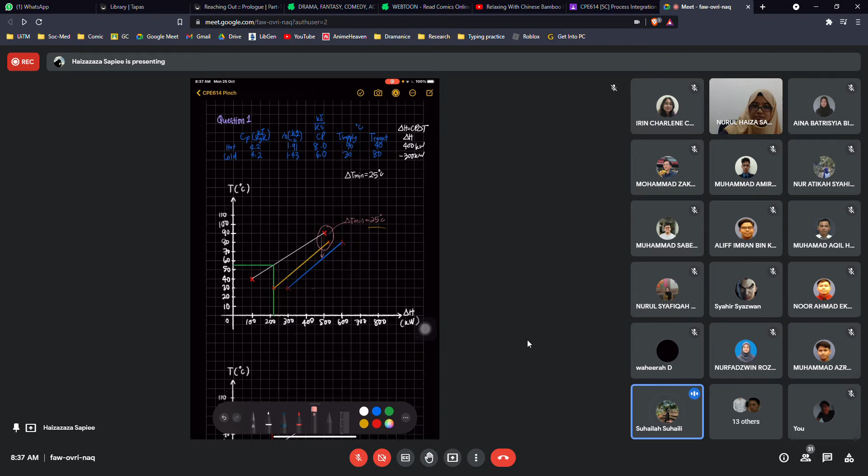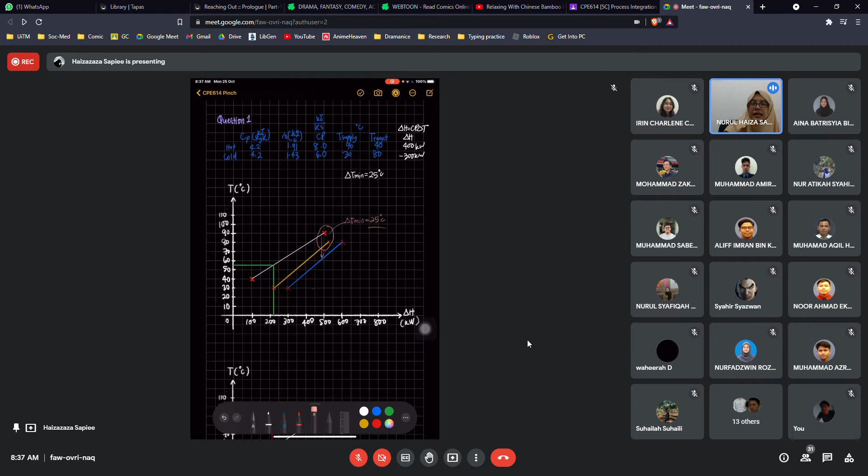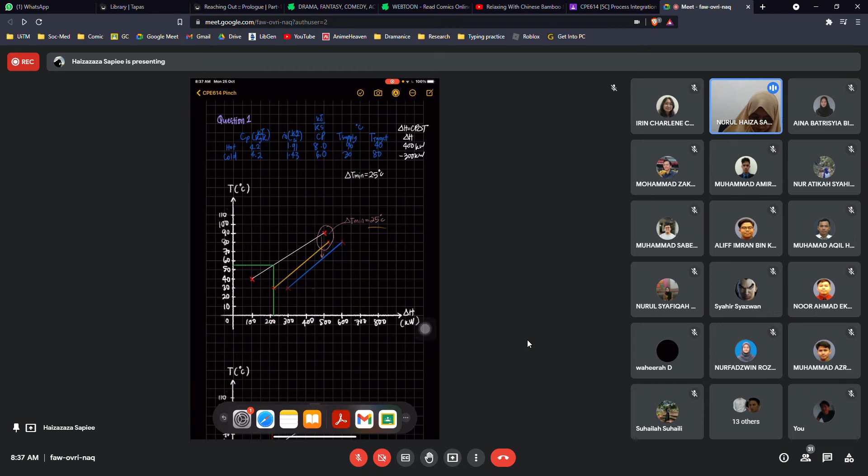Ya. Yang this one, kita jumpa pinch point yang baru ni sebab it only exists yang one line je kan? Sebab dia ada one line je kan? Okay. But the same thing applies. So remember macam I said during our lecture last week, was it last 2 weeks? The same thing applies if we choose the wrong pinch point. Contohnya kan, and that's why I think it's important for us to understand that we only can have one pinch point kan. So contoh kan, saya tak ingat with this class we cover that or not. Tapi contohnya

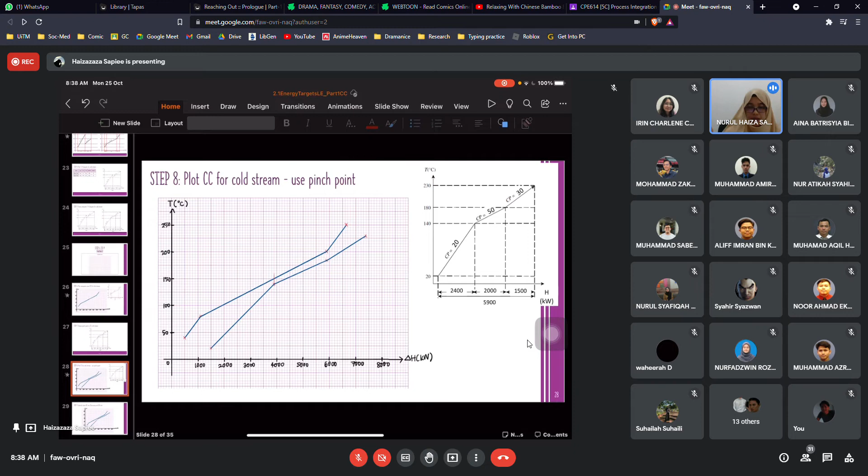So sebenarnya kalau kita nak tahu which point is right or wrong, whether or not our pinch point is right or wrong. So the idea is not whether kita hafal teknik dia ke apa. It's more on kita understand that pinch point can only occur at one place. So if there's another place yang different, that means that is your most constrained region. So if that's the most constrained region, maka we have to adjust according to that. Faham ke? So yes and no lah, answering your question, Soila.

Yes, that case occurs because it's basically one stream, but the same can occur kalau kita contoh yang macam ni tadi kan. So like I said, kalau tiba-tiba I didn't choose this long line kan. I choose this line kan untuk buat. So I akan plot ikut this line untuk jadikan 30 distance kat sini. But I would see nanti point yang dekat somewhere here akan jadi closer. Akan jadi less than 30. So then I'll have to adjust it accordingly.

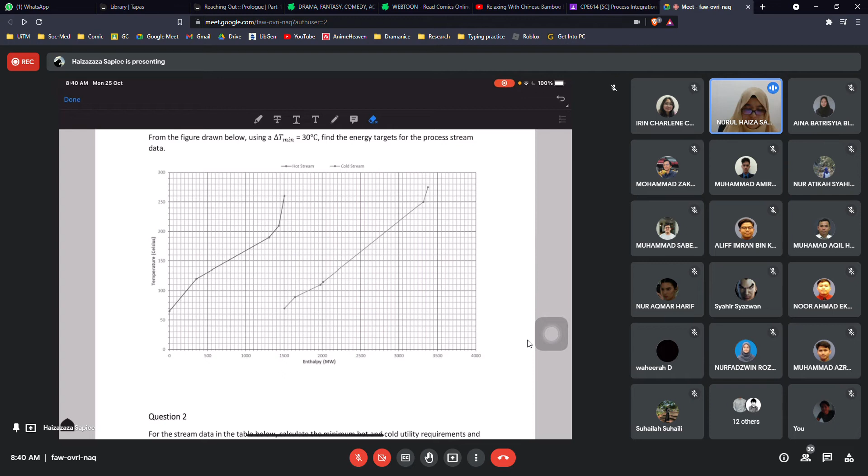Macam tu lah. So there's no like subjective way to do it. But then it's more of us being alert lah. Oh okay, kita faham. There's only one pinch point. Okay, this is wrong. So you just have to adjust it lah. Sebab everyone can start anywhere lah. So okay ke for this question 1? And types along the lines of question 1. Boleh Doktor? Boleh. Bagus ni.

Optimistic. But kalau tak boleh juga, take some time to hadam, we're human and so we need some time to digest it as well. So you can take a look at the question and try to change. Oh, contohlah kalau saya guna line ni, what happens? So you can actually see what happens to it and you can see it better lah, as compared to me saying it, sebab kita tak nampak.

Okay, so question 2, I think most of you guys answered it correct. So the answer is, Q recovery is 5,280 kilowatts. Banyak yang dapat betul. Ada segelintir yang salah, probably because of the scale. I think for this class tak ada yang jawab kan untuk, oh okay ada. Akasha jawab untuk delta T min 25 and 15, which is good.

So if you answer it, you would get with delta T min of 25, Q recovery dia being less. So bila kita dapat less, it's less better lah, so it's more expensive. But for some cases possible kan delta T min kita increase, kita punya Q recovery increase as well. So we can't give a general answer. Kalau soalan tanya, we have to actually prove it with facts. So if you say 15 is better, why? Because when we do it, we get it better.

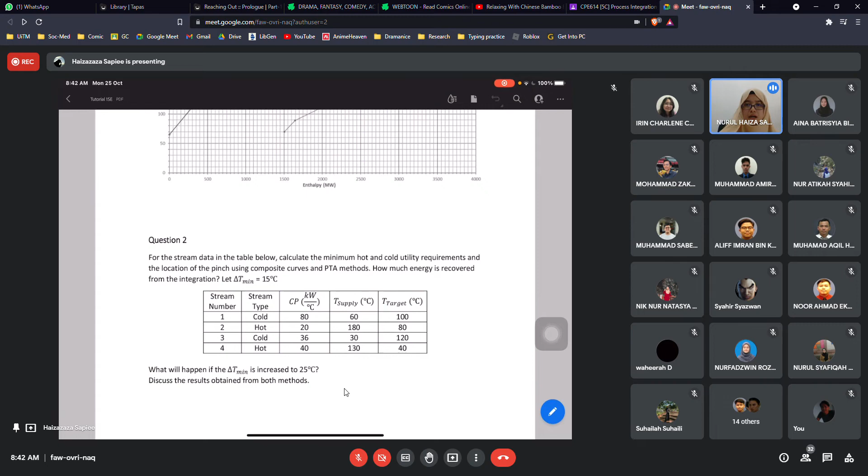So yang dapat the correct answer, that's really good. Yang tak dapat, that's okay, you guys can try to get the right answer. So 5,280 kilowatt for the Q recovery. QC min 320 kilowatt and QH min 1,160 kilowatt. So ada few yang salah kat sini, tapi boleh tengok balik. Question 3, most of you guys got the right concept. Question 3 pasal PTA, but the highlight there is to explain what deficit and surplus is. So surplus is you have an excess of energy.

Surplus is you have an excess of energy. Deficit is you require more energy, and then the concept of PTA is that we use... so sekejap macam ni, nak I have to stop sharing kat sini. Tapi never mind lah, I'll share later. Tapi basically yang you guys jawab ni majority betul lah.

So this one is also a question from previous MTA, last semester punya MTA. So just getting you guys familiar with the questions. Some people diorang dah boleh buat calculation tapi dia slack kat teori. So bila slack kat teori tak dapat jawab kan soalan-soalan teori. So I rasa it's a bit of sayang lah kan, sebab kalau tak you guys boleh score kan. So question 3 pun question 4 pun majority yang betul. And I know a lot of you guys, some memang buat banyak kali kan untuk dapat the exact answer.

So the answer is 83.6 for your Q recovery, and your QC min, QH min is 16.9 and 125.7 lah. So T pinch hot and T pinch cold dia pun you have to write lah, which is 50 and 40 respectively. So most of you guys for the questions you tanya regarding question 1, I hope it answers the question so far.

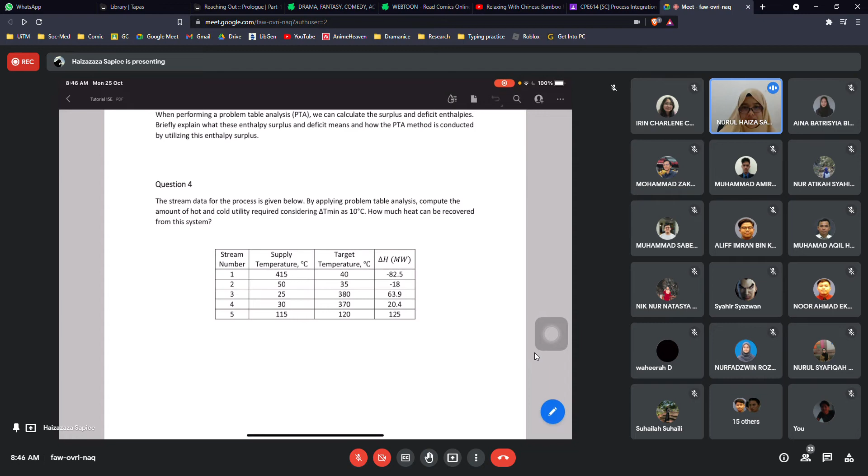Another question is Q recovery must always be positive or not? Why? So I ask you guys, kenapa perlu positif tak? So technically Q recovery is, siapa nak jawab tadi? Sorry. Q recovery must always be positive or not? Yes. So dia yes and no kan, because it's the amount of heat recovered. So one energy must be positive and one energy must be negative lah. But then it's recovered. So yang release would give to the demand, macam the surplus would give to the demand. Macam tu lah. So in terms of answering the question, you always write as positive lah.

I don't know how to do question 1. So question 1, okay. Is it possible to get third cascade? This is an interesting question. So is it possible to get a third cascade for PTA? So sebenarnya the answer is no lah. So if you have a negative value in your second cascade, there must be something wrong in our calculation. So kita mungkin tersalah ambil value negatif tu yang paling tinggi, ataupun kita salah tambah ataupun kita salah darab in the initial table. So be wary of that lah.

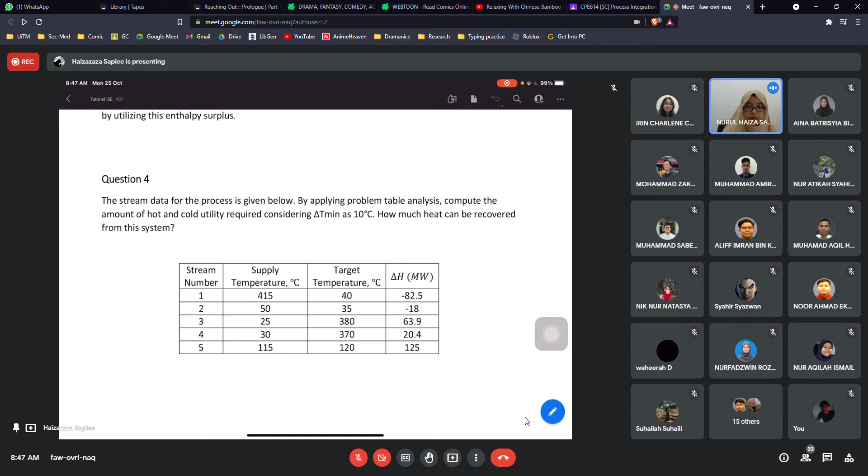So for question 1, would there be 2 lines? Do I have to find 2 pinch points? So there's only 1 pinch point ever. If there's 2 pinch points, it's a different question. So that we don't cover, I think. And that's all for all your questions. So I hope I answered all of the questions. Before we move on to the lecture today, is there any other last questions that you guys are uncertain about? Ataupun tak menjawab soalan ke, boleh bagi tahu.

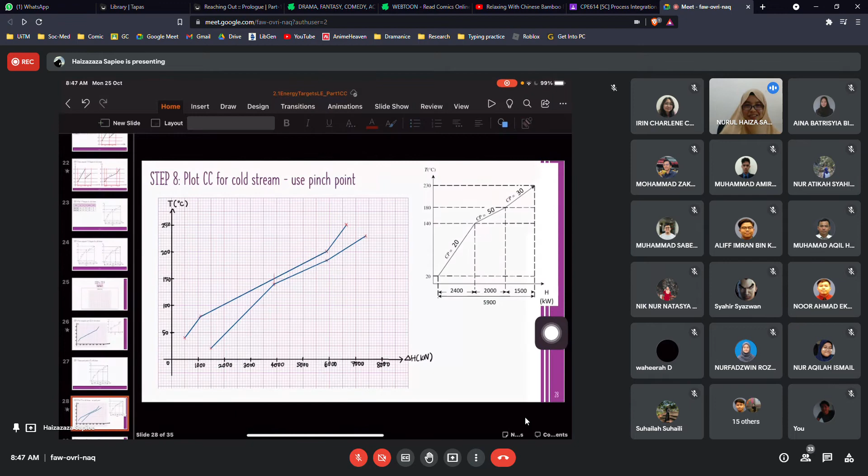Tak ada? So far okay, Doctor. So far okay. Alright, fantastic. So if you still have things that you're uncertain about, definitely let me know so that we can suss it out before we actually go into the next chapters. So chapter 3, okay, semua okay ke? Ke nak macam like 5 minutes breaks, just to clear your head or get things back into order? Ke nak proceed? Doktor,

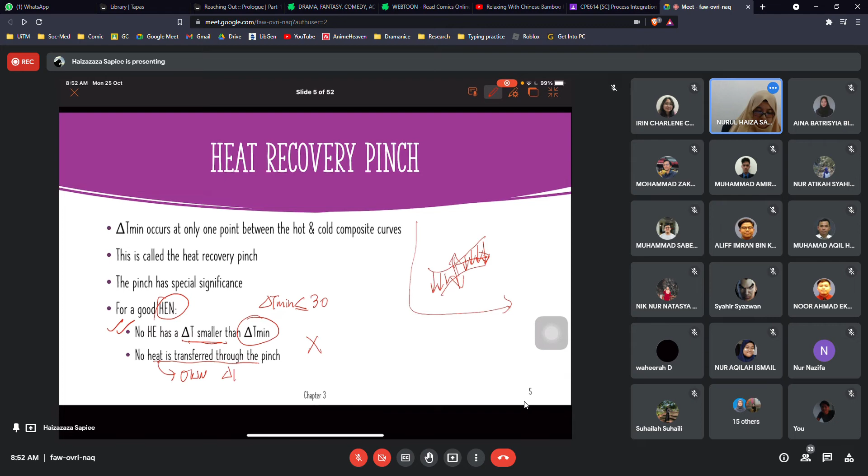Another thing is no heat is transferred through the pinch. That's why you get 0 kilowatt untuk your delta H. So this is how the heat recovery pinch looks like. The pinch ni bagi absolute limit. Here is your delta T min, and then you have your top part which is your T pinch hot, and your bottom part which is your T pinch cold. For practical delta T min, your T pinch hot must not equal your T pinch cold. So curve ni tak boleh berlanggar; if berlanggar it will not be feasible. When you have that pinch, you would have your heat source and heat sink. So towards the right, kat sini kita panggil above pinch.

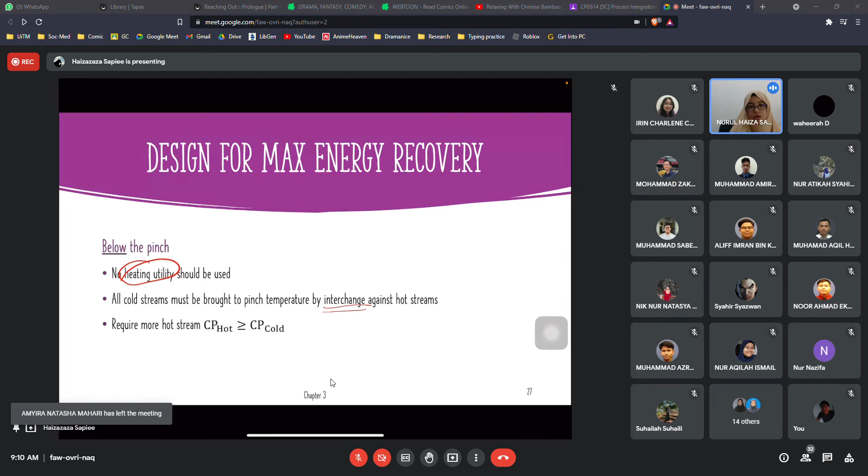So disebabkan perlu lagi hot stream, your CP hot or your flow rate of your hot stream must be higher than your CP cold. So those are your CP rules. Okay. So CP rules ni dibuat based on the idea of no heating must be used below pinch and no cooler must be used above pinch.

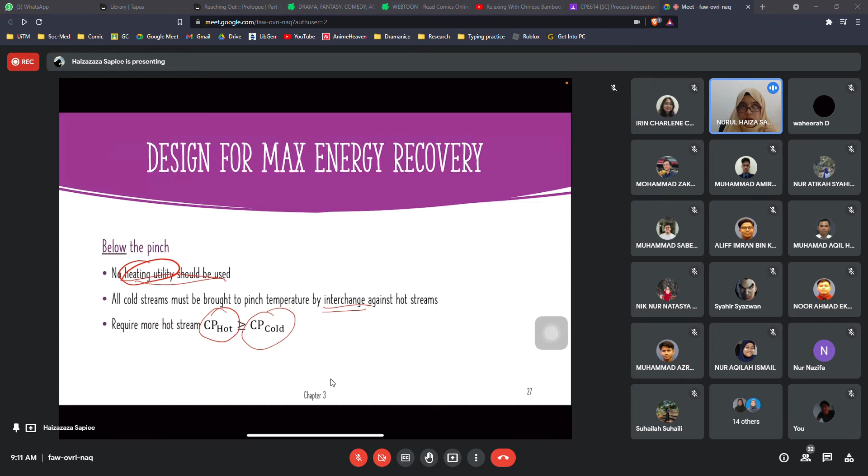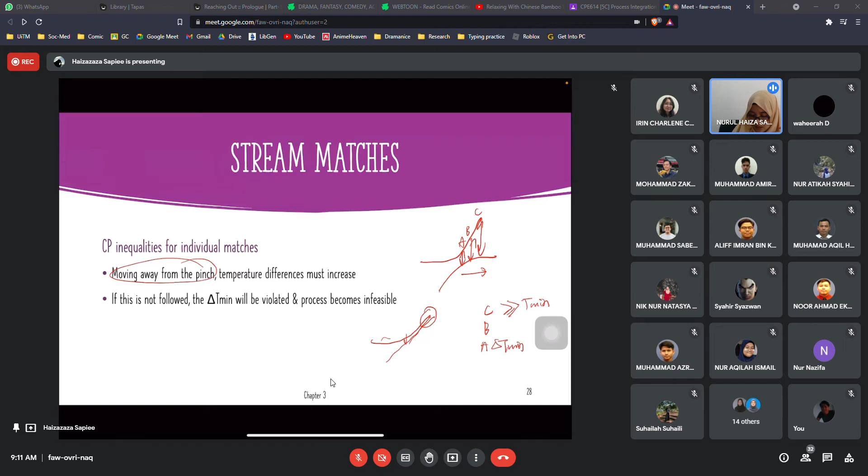So bila kita move away, contohnya A, B and C. So C lagi jauh daripada pinch. So your C is way bigger than your delta Tmin, whereas your B is medium, and A is your delta Tmin. So kalau kita dapat macam ni, contohnya kalau kita kata this is your pinch point, tapi kat sini delta Tmin is less, maka dia akan jadi not feasible.

Yes, Irin nak tanya soalan? Okay, tertekan. Irin, are you there? Sorry, tertekan. Kucing tertekan. Okay, that's fine. Ingat nak tanya soalan, boleh je kalau nak tanya.

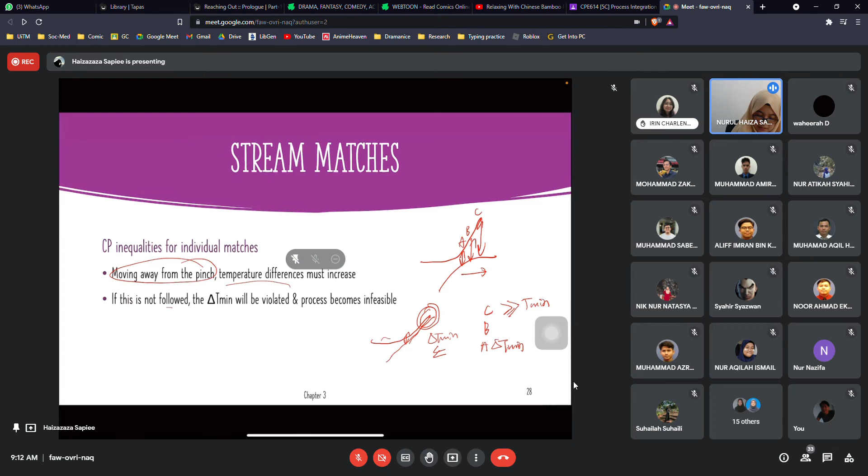So bila kita tak dapat follow this one, your delta Tmin will be violated and your process will become infeasible. So these are all words and it's really hard to see. So basically we're going to do this in our example kejap lagi. Tapi what it's trying to say is, above pinch tadi CP apa kena lagi besar? What is bigger? CP hot or CP cold? So above pinch, cold.

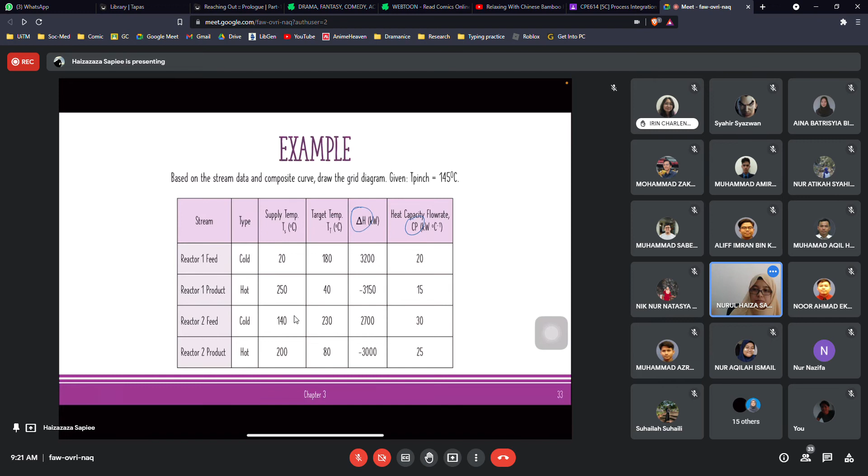We're gonna continue to actually follow these steps untuk actually praktikkan semua yang kita faham tadi. So basically, we're going to look at the same question yang kita tengok in the previous 3 lectures, for your CC and PTA. So kalau perasan it's the same. So you can calculate your CP and your delta H macam biasa, and you know what type of stream it is. And kita dah buat step kita punya composite curve.

So untuk steps untuk buat heat exchange network, these first 2 steps are exactly the same macam apa yang kita dah buat sebelum ni. So kita kena extract stream data, you have to complete it. Kalau ada value yang tak ada, kita kena calculate. If CP tak ada, we have to calculate. If delta H tak ada, kita kena calculate. To extract the stream data, make sure whether it's a hot and cold stream, maksudnya it only changes with temperature, not with composition, no mixing involved.

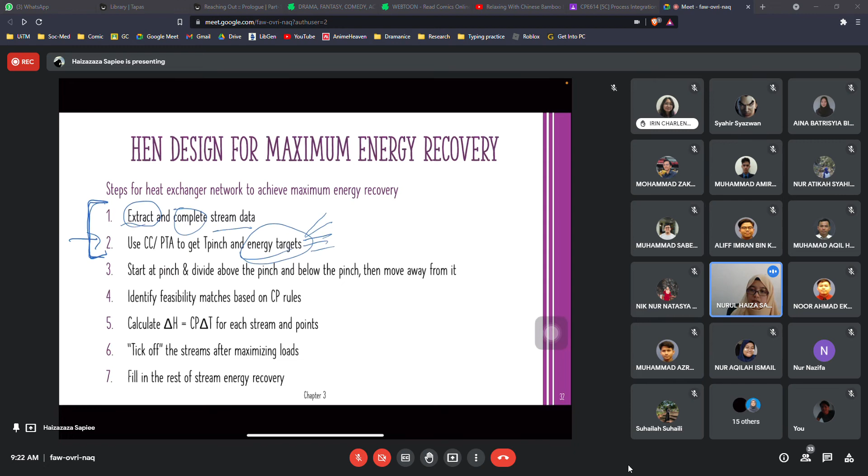And then step number 2 is your entire chapter 2. So kita kena pecahkan ikut step apa yang kita nak buat untuk dapatkan energy target. So for this lecture, I'm going to skip step 1 and step 2. But you have to remember, semua benda yang kita buat dalam tutorial tu, we are going to use it after this chapter. So kita dah dapat composite curve daripada first lecture, second lecture hari tu.

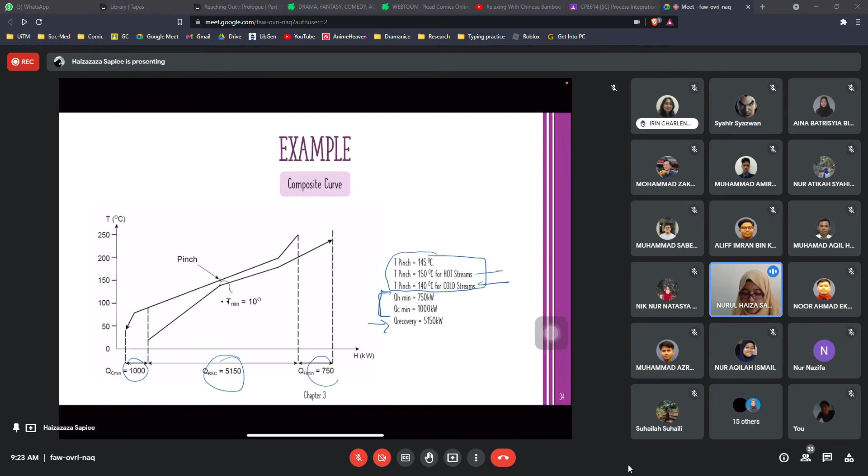What we need is your T-pinch. So kita ada T-pinch hot, T-pinch cold, and kita ada QC min, QH min and Q recovery. Sama juga dengan apa yang kita dapat kat sini, just reminding how a composite curve should look like. So step 3 is where our heat exchange network actually starts. Kita nak start lukis heat exchange network. Macam mana kita nak lukis grid diagram kita? Where do we start?

Exactly. So we want to draw the hot and cold stream. Remember, your hot streams must always be on top and your cold stream must always be below. We have 4 streams, 2 hot, 2 cold, so 2 streams going to the right and 2 going to the left. And you write your temperature satu-satu, so 250 to 40. Jangan confuse, kat sini ada hot, cold, hot. Jangan buat salah. You must always rearrange it so the hot is always on top and cold is the bottom.

Some people carelessly do it even dalam exam ataupun MPA, which is sangat rugi sebab memang salah. Okay, and we do the same thing. See how I label the stream type. So 4 would be from 200 to 80, 1 would be from 20 to 180, and lastly 3 would be 140 to 230. Biasanya line ni ada daripada sini, cumanya bila kita divide pinch, pinch temperature dia berapa? And kita tulis CP dia kat sini. So what is the pinch temperature from the previous slide?

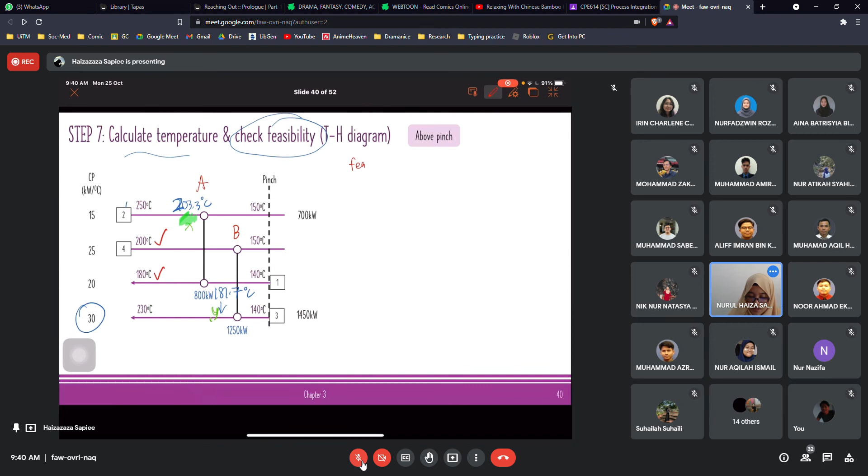So kita akan tulis ni adalah, contohnya ni adalah exchanger A, ni adalah heat exchanger B. So you want to check your feasibility of your heat exchanger A, you must do a TH diagram. So TH diagram is basically, so 2 points. So contohnya untuk A, so your delta H would be 800 kilowatt and your temperature would be 140, 150, 180 and 203.3. Okay. So where I get that values is basically line ni dengan ni lah.

So heat exchanger A tu kalau kita tengok dia adalah 800 kilowatt. It goes from 203.3 degrees Celsius to 150 degrees Celsius, and from 140 degrees Celsius to 180 degrees Celsius. Okay. So apa yang kita buat is from 140 pergi ke 180. And you have 150 from 203. So 203 pergi ke 150. So what we see here is that we have dia punya distance kat sini. So this one is basically your delta T min lah, which is equals to 10.

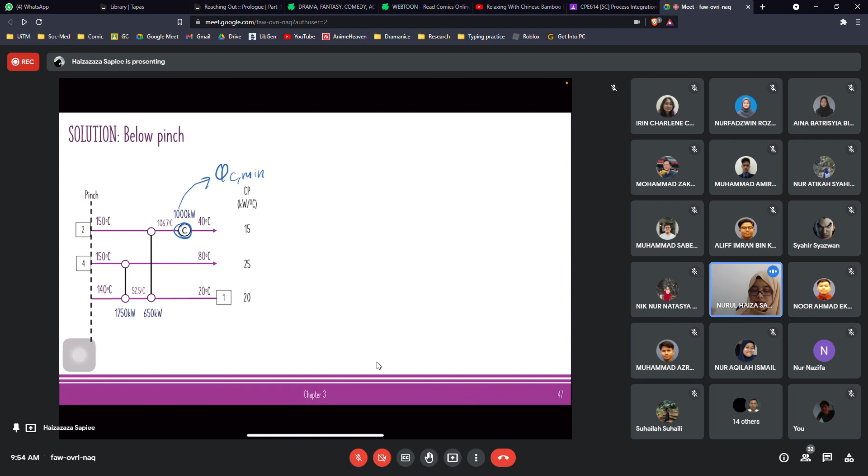But that's okay, you can take some time to digest that. Dan ramai selalu yang confused kat situ. Kalau korang nak berdebat sesama korang pun that would be highly encouraged. Sebab nanti kita akan lagi nampak kan. So usually we have our own way to explain things. So kadang-kadang benda tu akan lagi membantu. And if you still don't get it, for now just keep in mind that it's a smaller value lah yang kita ambil, and then along the way hopefully we can actually try to see why that happens.